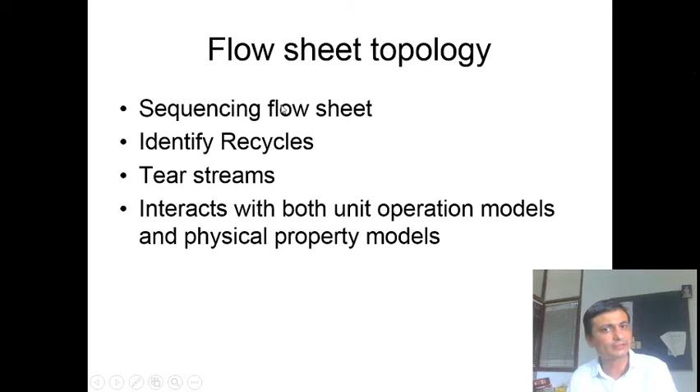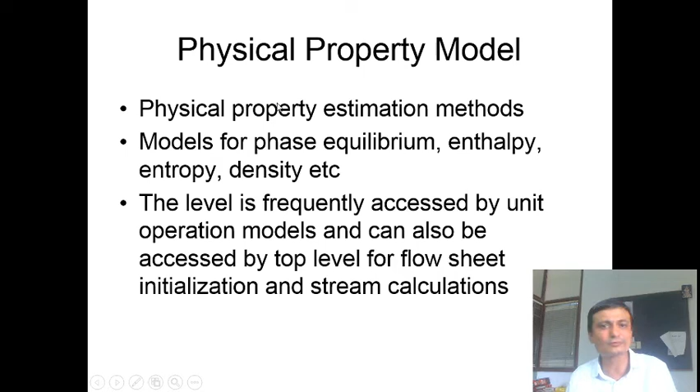So friends, we discussed the three-layered structure of a modular mode simulator. Flowsheet topology, we described flowsheet topology. We also discussed unit operation models, and we also discussed physical property models. So we'll revise these three structures and how they interact with each other while they solve our simulation problem.

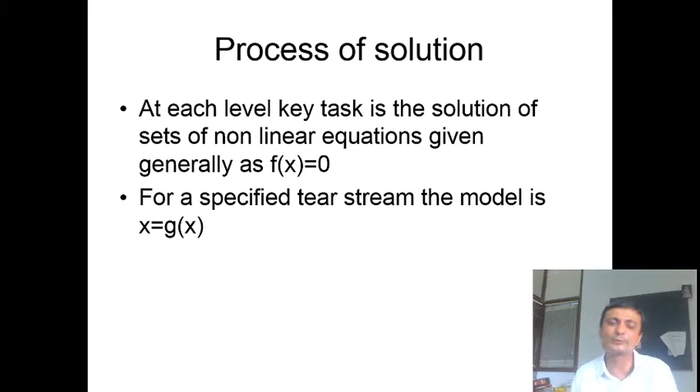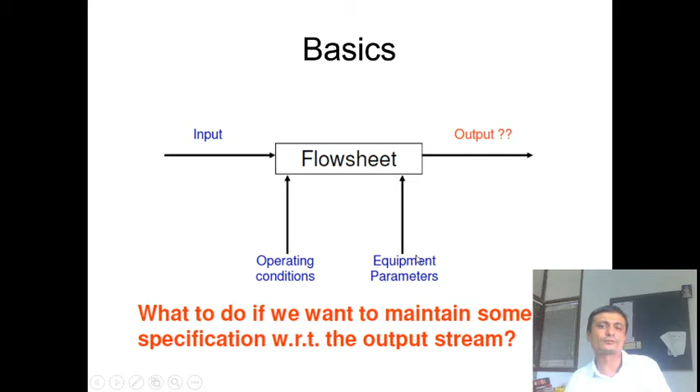We'll also try to discuss how a particular process simulation problem is solved. There are two kinds of things possible. It can be an f(x) = 0 kind of model or an x = g(x) kind of model, depending upon the process. We'll then discuss in detail the sequential modular approach. So we know that this is a typical problem for flowsheeting, and a sequential modular approach is capable of solving this kind of problem.

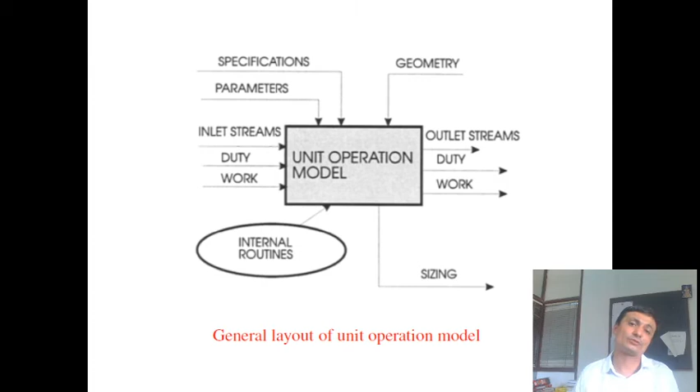Now we'll also discuss a classical unit operation module. So this is in general a unit operation module. All the different things mentioned here are in general. Not every unit operation model requires this or will have this, but this is in general a unit operation model. Now this unit operation can be a heat exchanger, a distillation column, a pump, or it can be a reactor, it can be anything.

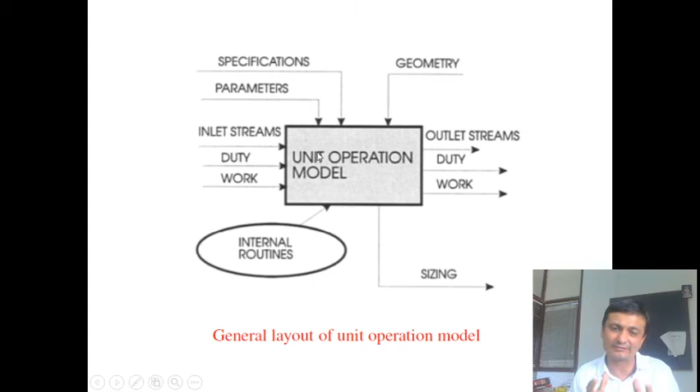And depending upon that model, there will be an internal routine associated with it, maybe one or more than one, depending upon the unit operation under consideration. So this is the general, classical layout of one unit operation model, and likewise there are so many modules available in a sequential modular approach.

Next we'll discuss control blocks and non-standard streams. Control blocks are the blocks which control some specifications. Say I want some specific temperature in an outlet stream, or we need a specific ratio of the reactant, or we want a specific conversion in the reactor outlet stream. So any specification we add requires a kind of control block, and we'll discuss those control blocks used in simulators.

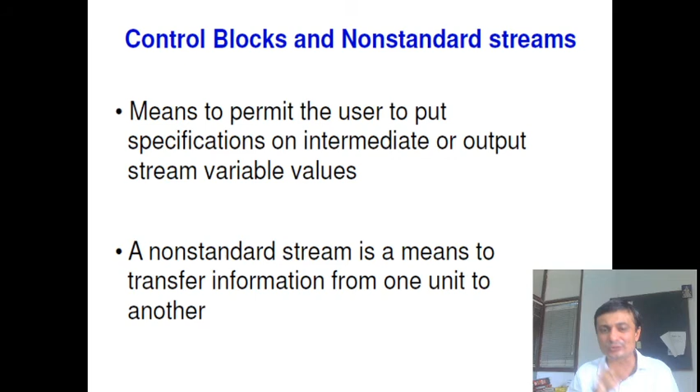Non-standard streams are the streams which pass information from one place to another, and they are not process streams. Process streams carry material or energy, whereas these streams contain only information from one block to another block, and they do not really exist in the flow, whereas process streams exist. They are there in the pipelines of the industry.

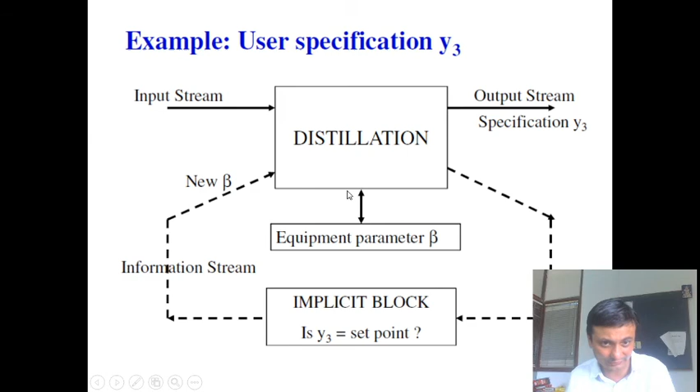We'll also try to discuss how to deal with any specification in modular mode. So this is the non-standard stream I was talking about, where it passes the information. This is the information stream, and it basically tells you how to solve a given specified problem. We'll also discuss ways to deal with a flowsheet with recycle. So if there's a flowsheet with recycle, how do you solve it?

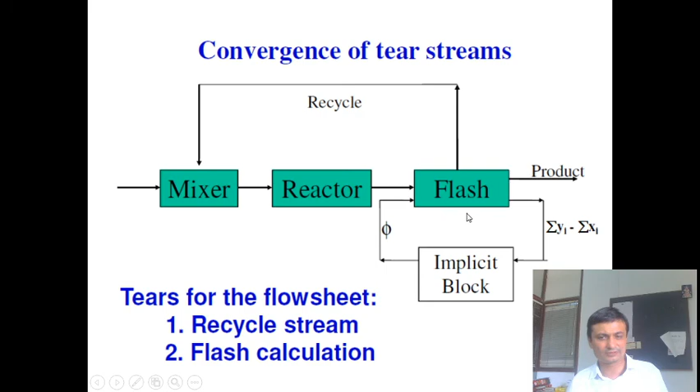So there are two different algorithms. Whenever you have another implicit block, where this is a classical flash operation, you need iterations here. So basically you initiate here, there is one iteration going on due to the recycle, and this iteration is due to the flash operation. So how do you solve this? There are two algorithms shown, and we'll discuss both of them. And on the same lines, I'll try to give you some idea of how to solve a bit more complex flowsheet in the sequential modular approach.